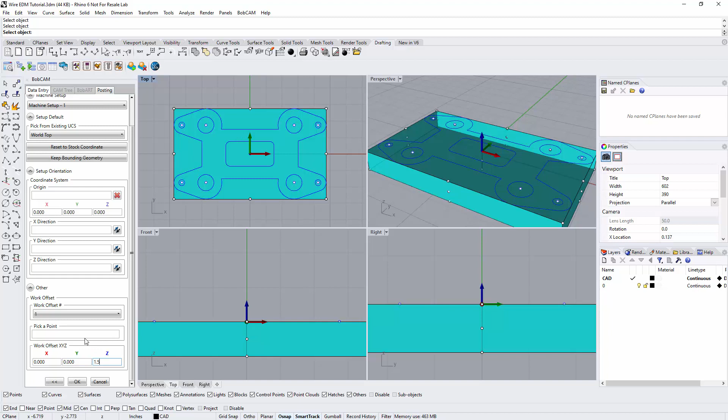And then right here, we can go and pick our origin. So where are we basing all of our code off of? So I'm actually going to leave it right there at XYZ 0 because I'm using that area. I'm going to be cutting a hole there to plunge into anyway, or feed my wire through, and then go and cut my part. So I'm good with it right there, and so I don't even have to set up the origin. And the only thing I'm going to do is lift up Z, just say 1.5 inches, and then I can hit OK.

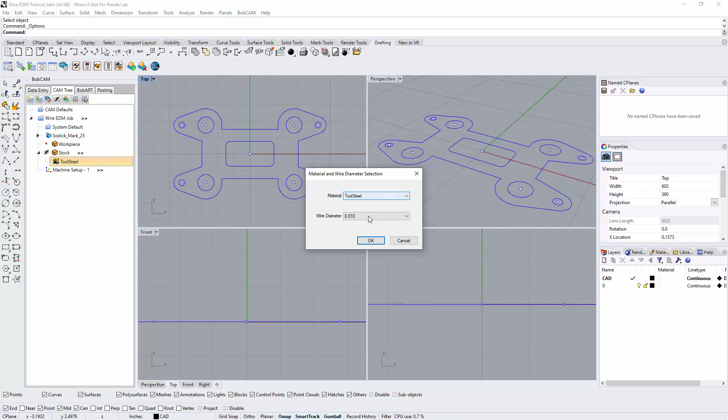After I have the stock created, I like to just right-click on the word stock and say blank, unblank. And then if I expand that, I can see what material is currently selected. And if I want to modify that, I could just say edit and choose a different material. Depending on your machine and post, you can also open up a database that lets you change all the information for this. But I'll go with a 10 thou wire, hit OK.

And then with this one, we really just have kind of one setup for this. A lot of these are going to be inside cuts. So I'm going to right-click on my machine setup and I can see what types of features I can make. So we have a 2-axis inside, meaning it's a 2-axis cut, just vertical walls, and they're inside cuts. We have a 2-axis outside, so that's going to be for the outside of the part. We have a 2-axis open, which would allow us to do just a specific open area.

Or we get into 4-axis. And we're not going to do any 4-axis here. It's essentially the same settings as doing a 2-axis, except you're picking multiple pieces of geometry. If we had a center pocket that was a 4-axis, we'd have this center pocket here, and then maybe a wider one because it's got a taper to it.

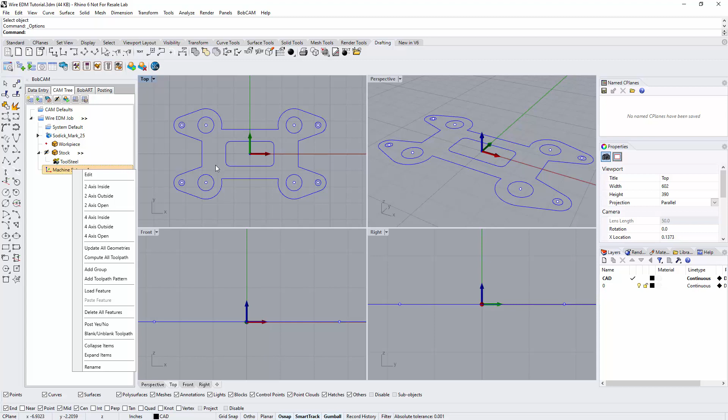So I'm going to start by doing a 2-axis inside, and I'm going to select my geometry as these inside shapes here. So I'm just going to pick all of them right here. So we're on 7, 8, and 9. And then all the points that are on the inside of that, those are going to be the points we use to say start here and feed to the wall. So we'll have holes drilled in all those locations.

So I can then go in and look at each one of my chains and see where the arrow is at. So if I want to pick a different start point, I can. So for that one, I'll put it in the middle.

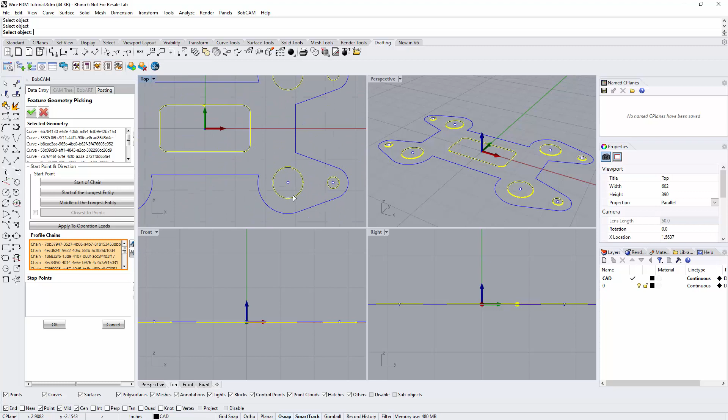The rest of them are circular, so I'm really not too worried about it. And then I could go ahead and just hit OK. Now, when I hit OK, I could just go next. Right here, we have our stock thickness. We have the location of our upper and lower guide, which you may or may not need depending on your machine. Some machines use this, others don't.

Right down here, we have our choice of whether or not we're going to do glue stops with or without leads, or whether or not we're even putting glue stops on the part. So your glue stop is an area that before it finishes cutting the entire part, when you still have a tab left, it's going to let you go in and add a stop distance. So essentially where we stop, so we get a chance to either glue the part or drop a magnet on it so the parts don't fall out. In my case, I'm just going to say no glue stop.

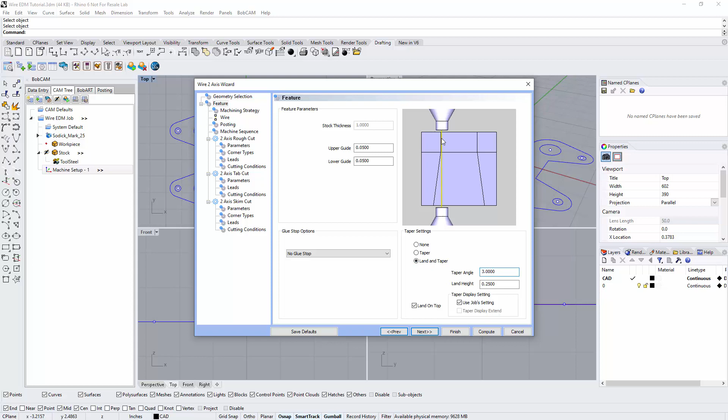And then right here we have our taper settings. So the taper settings are either none, so we're going to get a straight wall. We can add a taper to the geometry, and we can tell it whether it's a left or a right taper based on whether it's a negative or positive value, and whether we taper from the top or the bottom. Right here, we also have the ability to do land and tapers, so we can have a vertical wall and then the taper. But in my case, I'm just going to go with none, just a standard cut straight through.

Then I'll say next. Right here, we get our choice of doing different types of cuts. If we left glue stops, you would get one extra cut, which is a tab cut. And so in this case, because it didn't leave tabs, we have a rough cut and then our skim cuts. Now, if you want to do multiple skim passes, you do not have to add in multiple skims to your operation. What you're going to do is just leave one, because when we get to the skim pass, we get to tell it how many skim passes we're going to use. So I'll go ahead and say next.

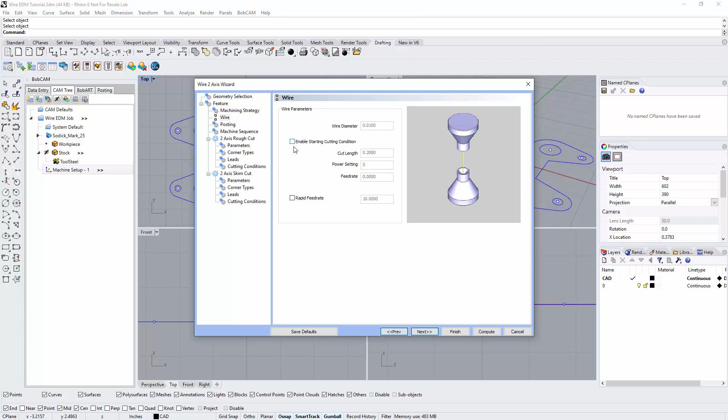Right here's our wire information. So it's a 10 thou wire, whether or not we enable starting cutting conditions or a rapid feed rate. After that, we'll hit next. Right here's our posting tab. So we have our spline or arc output tolerance, which I'll leave at a 1/2 thou. That's fine. Our work offset number, and then our posting order. So we could say finish individual shape or go by operation. So go do all the rough passes, then all the skim passes, then everything. I'm going to go with individual shape, rough it, skim it, do what we need to do in that one shape before moving on to the next.

Right here we have our machine sequencing. So how do we organize the order of this? Closest is going to start at whatever position we select here and go to the next closest cut. No sorting seems random, but it actually runs in the order that you pick the geometry in. Or we could say, let's just go across the X direction or the Y direction. So I'll say, let's go X direction, start from the upper left-hand corner, and we'll zig.

Next, I then have my parameters. So I can either do a standard profile cut, so we just cut our way around, and the part's going to drop out. Whatever slug we have is going to fall out. Or I can go with a coreless. And coreless for me really depends on the hole that I'm trying to make. It's usually going to be a hole because I have the ability to go in and drill a hole and then have this kind of clean up the rest of the hole. So if I have a 1/2 inch hole in my part and I've drilled a 1/4 inch hole in it, I could have a coreless cut basically go in and kind of pocket it and take all that material out. Or I could go in and just do a standard profile. So I'm going to go with the standard profile.

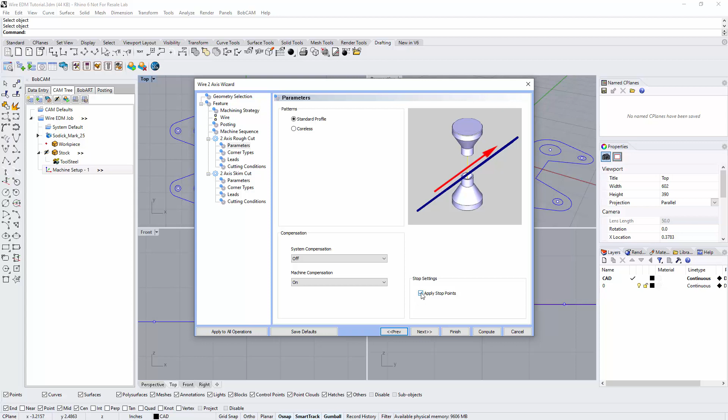So you can either rethread, do whatever. It's a stop point that just stops it. I don't have any selected, so whether this is on or off is not going to change the tool path. Right here we have our corner types, so we could go with a sharp corner. We can go with a round corner. We can make a loop radius, a loop length, a triangle, or a bisected line. And we have them both on external and internal corners.

Right here we have our leads. So if we had a 1/4 inch hole drilled into that 1/2 inch hole, so we've already had a 1/4 inch cut, especially with the coreless, this is important. I go in and tell it what the diameter of the hole is that I have already there. That way it doesn't do that coreless cut from the center of the hole. It does it from the edge of the diameter. So it does it from where the hole is drilled to. But I'm going to leave that at 0.

I have a thread wire, whether we thread it automatically, vertically or not. And then we just have some leads. So we have circular leads. We have perpendicular leads. We have a perpendicular blend, so it actually adds a radius to the corner. We have parallel. And then right here we have select point and point blend. So select point just lets me pick a point. It goes from that point to our start location and it starts its cut. You could even say perpendicular to the closest wall. Or you can go in and do a point blend. So we still have the points, but now it's going to add a radius into that cut.

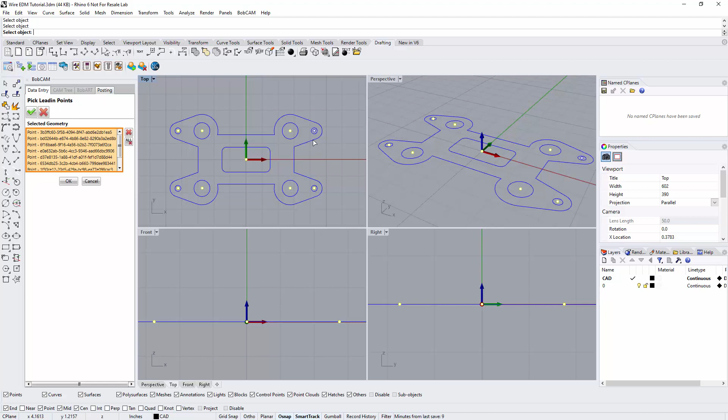So for me, I'm just going to say select point and then pick points. And I'm just going to go in and pick all these points that we drew earlier. So I'm just going to add all these in. There should be one right here at XYZ0. We'll grab all these as well. And now it knows where it's going to start from. So I'll go right there and then hit OK. Now, after we have all those points selected, you're only going to see one, but it does remember all the locations to those holes. So I'm going to choose the next option.

Now, inside of next, we get our choice of our cutting conditions, and whether or not your machine has a database is going to depend on your machine. Mine has a database, so I can define the offset, the power setting, and the feed rate, as well as any speed and tension for the wire. If you need to edit this, don't edit it now. And the reason I say this is because on the edit table, all we see is the rough and the single skim pass, but I want to do 3 skim passes. So I don't actually get a chance to set up my skim passes until I get to the next page, which is the skim. The last page of the entire job is another cutting conditions page that I can go in and make my modifications to.

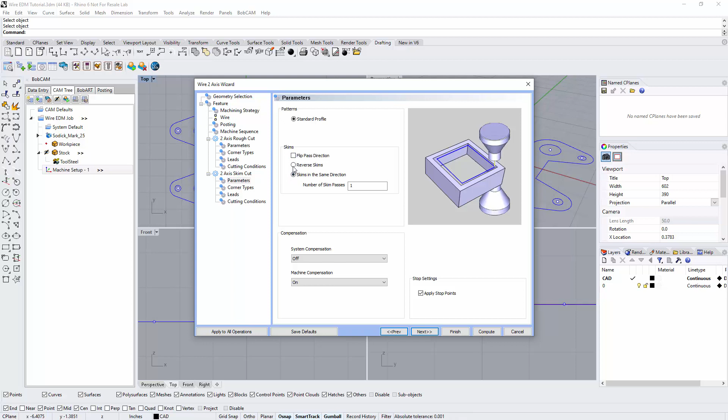So I'll do a standard profile. We have a choice to just flip the pass direction. So if we went clockwise on the rough, it's going to go counterclockwise for its first pass on the skim. And then with the skims, we could either say run them all in the same direction or reverse the directions as they cut. I'm going to run them all in the same direction, and I'm going to set their number of passes to 3. And then again, I'm using machine compensation, and I didn't set any stop points. So next again. Corner types, just going to leave them on sharp. Just going to let it cut based on what the geometry shows, and that's primarily what you're going to use the sharp for.

Right here's my leads. Once again, I do want to use the same leads. So instead of having to go back and repick all those points, I'm going to go up to the leads page for the rough pass, and I'm going to say apply to all operations. And what it does is it copies the leads page from here down to here. So now we'll see I have the same lead in and lead out points.

Next again, we have our cutting conditions. So again, this would be the page that if you were going to set up the offset, the power setting, or the feed rates for any of these tool paths, this would be the page I do it on, because if I go into the table now, I get all of the passes defined, not just the initial rough and skim. So now I can hit OK.

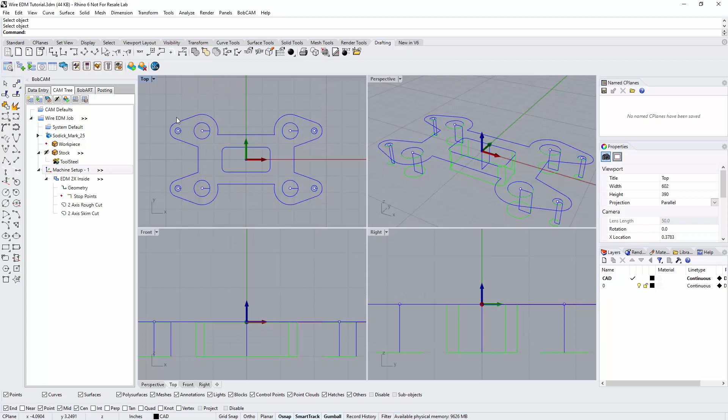When I'm all done, I can hit compute. And you won't see much on the top view. That's what's really nice about having this perspective view. But there it is right there, just going around making its cut. There's all our leads. You can see all the lines for those leads just connecting in. And then that's it for the interior cuts.

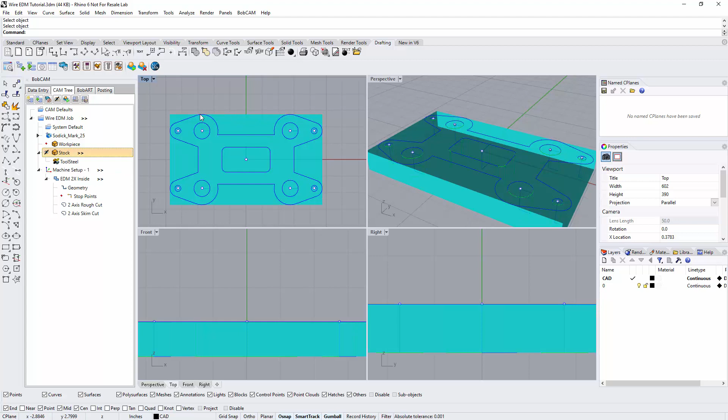So now I could go in and do the exterior cut, but I want to look at my stock real quick because I want to pick a good spot. Probably one of these top edges right here is where I'm going to try and do my lead for this so that I'm off the part. So I'll right click, and this time I'm going to do a 2-axis outside. So I'll select my geometry. I'm going to pick that piece of geometry there, which I've joined together using the join function of Rhino, so I can pick the one thing.

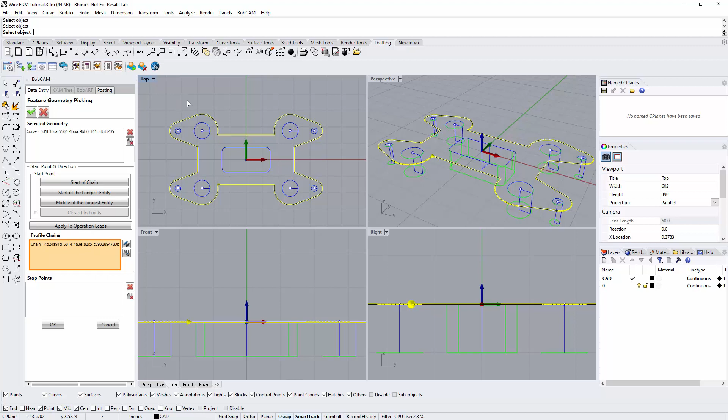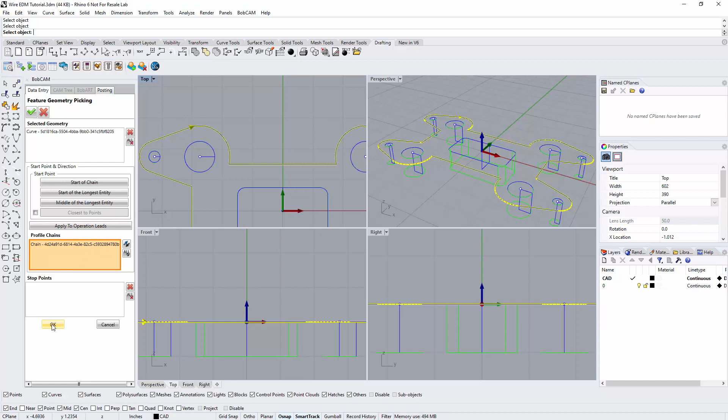Otherwise, if it's broken, you brought it in as a DXF or anything like that, you will have to pick each individual entity. And then right here, I'll pick my chain, and I'm just going to zoom right on this corner and pick it right there. All right, and I'm also going to flip the direction of it by clicking the tip of the arrow. So I want it to be a G41 compensation to the outside. So that'll get me to go to the outside of the part. And then I just have to make sure I have a lead that's long enough to go off the stock. When I'm done, I can hit OK and then go next.

Now with this one, we got our upper lower guide, whether or not we're using glue stops. So I'll do a glue stop this time. We have our stop distance. So how big of a stop do we make? And then whether or not we're tapering. We don't have a land and taper on the exterior cut, on the outside cut. So I'm going to leave that to none. Right here, I'll choose my strategy of a rough cut, a skim cut, and a tab cut.

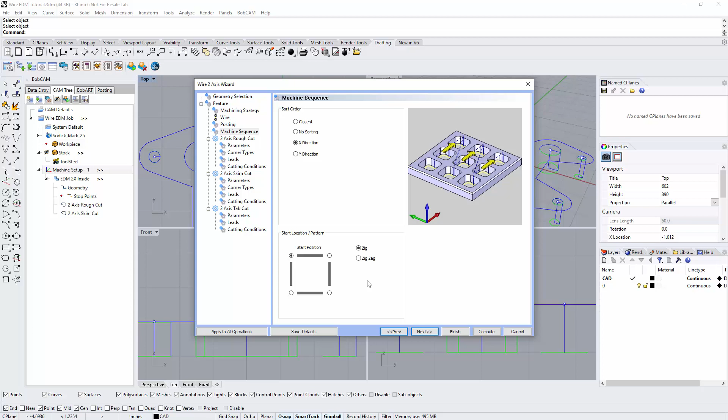So I'll go next. Right here, we have our wire information and our posting. So with posting, we still have the arc spline output, the work offset, the posting order, but we could say, let's do our tab cuts last so that we can wait till the end to cut those. Right here, we then have our sequencing. Again, I'm just going to go in the X direction. It's only one part, so it really shouldn't change too much. I've picked my start point already.

Right here, we have our standard profile, system compensation off, machine compensation on. Our corner types, I'm going to leave those on sharp once again. Our leads. Now for the leads, I just need to make sure the leads are long enough to get off the part. So I'm going to set up a circular lead in, and I'm going to make the radius a 1/4 inch, and I'm going to make the length a 1/4 inch. And that should be plenty to get me off the part so I can run the wire and then just start from the outside into the part.

Right here, we have our cutting conditions. Again, ignore this because the last page is going to be the cutting conditions. That's where we could set them all up if we have to modify them, or it's where we get to see them all if we have the database. Right here's our parameters, so we can start with a standard profile. I'll do 2 skim passes.

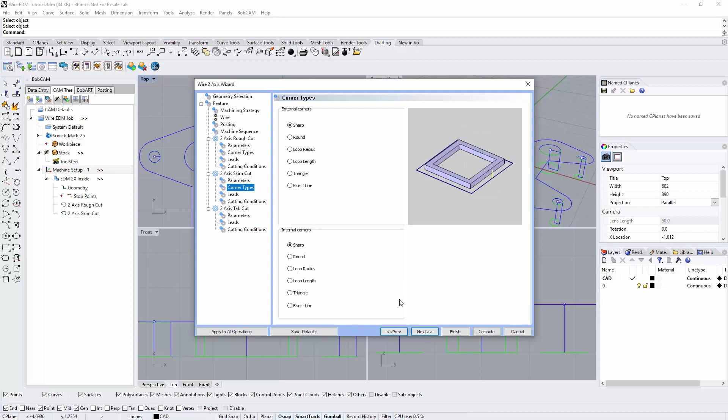System compensation off, machine compensation on. I want that G41 and G42 to output when I need them. And I'll even do the reverse skims on this one. Right here is our corner types again, our leads once again, and our cutting conditions once again. So I want to do the same kind of thing with the leads. I'm going to set this up as a circular.

I'm going to set the radius to a 1/4 inch and the length at a 1/4 inch. And then go next. Cutting conditions, once again, wait till the end.

And then we have our parameters for the tab cut. So we could say, use the standard profile. We could flip the pass direction. We could even use a knockout to go in and knock it out. But I'm just going to flip the pass direction, machine compensation on.

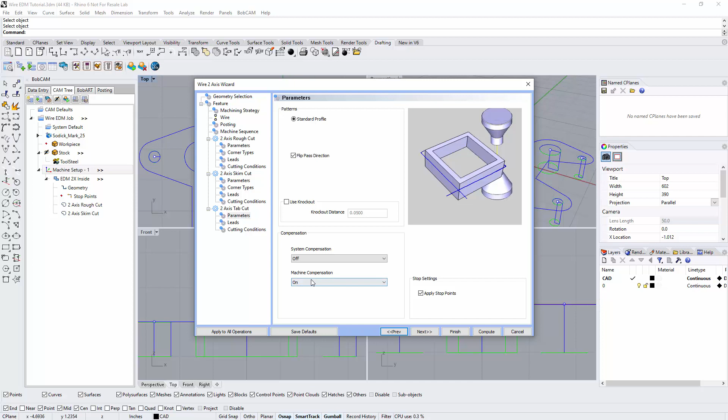For the leads, I'll go just perpendicular at 100 thousandths. And then right here's our cutting conditions. This would be the page that I would finally go into my edit table here and put in any of the values I need to enter in. Otherwise, I'll just hit OK and hit compute.

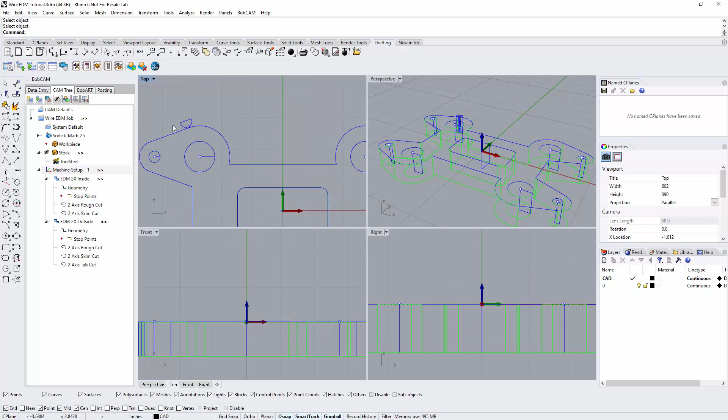And once again, there's our cut. You can see our leads right there all the way around.

So now we could go ahead and launch the simulation. I'm just going to go up to Start Simulation right here. Remember, it's going to launch into whatever screen you're active on. So I'm going to double click on the top here first and then launch the simulation.

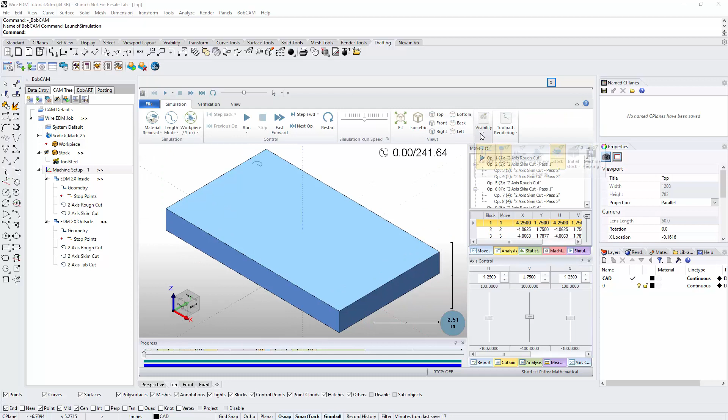Now, when the simulation for Wire EDM launches, one of the best things you could do is turn on a setting in here, which if I expand this down and I go to visibility, you could turn on machine housing. This is just a good way to kind of see what's going on. You can see the guides of the machine kind of cut, and it just helps out for viewing everything. So I'm going to slow this down and say run.

We're going to see there's our first arc, skim passes. There's our second. There's our third, fourth, fifth, kind of reset there. There's our first skim, second skim, third skim. And it's just going to keep going around doing the same thing.

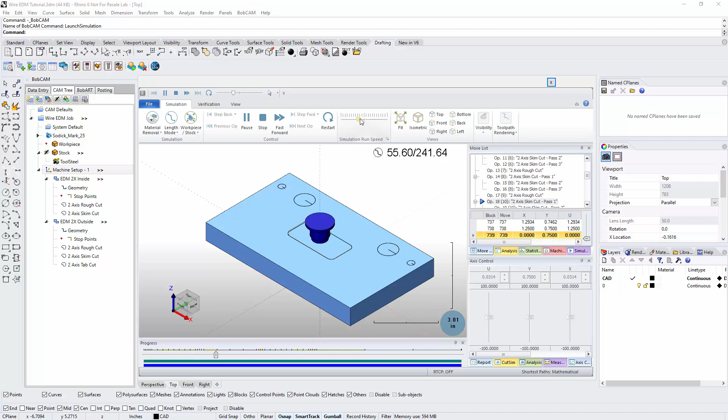There's our inner pocket. There's our extra holes. And then when it gets to the end of this, it's just going to start on the outside over here into the part. And we can see it starts off the part. That's perfect. That's exactly what I wanted to see. It's going to go in, keep cutting all the way around.

And then it's going to go ahead and lead out right there and then reverse the skim back. And I'm just going to fast forward. So it goes and cuts everything.

Now, in the simulation video that you'll see I did the milling part in, I didn't have the ability to remove this stock from here because I didn't have any extra stock. But with this one, if I rotate it, we'll see the cut goes all the way through, but I still can't really see what the final result is. I know what it's going to look like, but I want to see what the final result's going to be.

So the tab we can go to is over here. It's the Measure tab. And in here, there's an option called Remove Chips, and either you select chips, or in this case, I'm going to choose this option that says only keep one part.

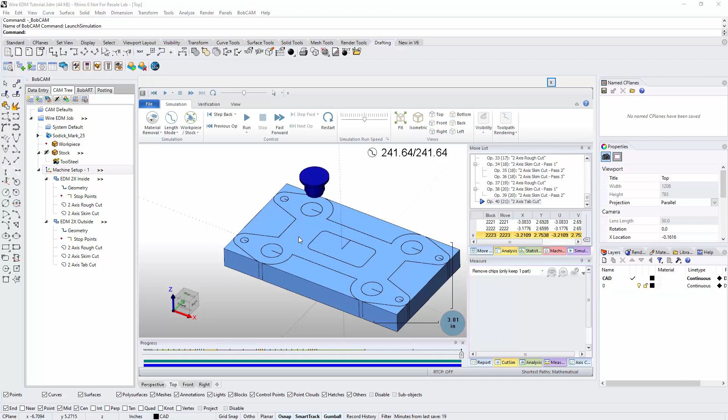By doing this, I could go to my part inside the simulation window and click on it with my middle mouse wheel like it's a button. So I'm just going to click that middle mouse wheel in, and anything that's not connected to the part will disappear, and this is what I should expect to get at the machine.

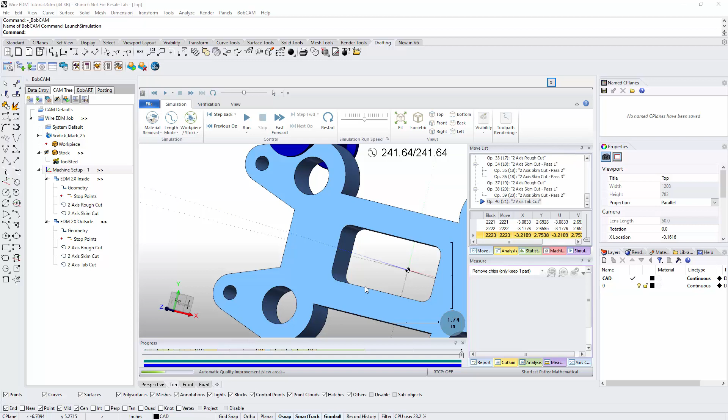So we're using that wire. We got a nice sharp corner in the corner there. Basically, the remove chips went in and just gets rid of all the areas that would have fallen out anyway. So there we go. We have our entire part done.

And again, when we're all done, we can close it out. And then to generate the code for this one, the big thing is make sure you have the right post processor, right machine. You can switch the machine if you need to, but just know the database does not transfer between machines. So if you pick the wrong machine at the start, it's not going to transfer into the new machine. You'd have to go back and reset up all your cutting conditions.

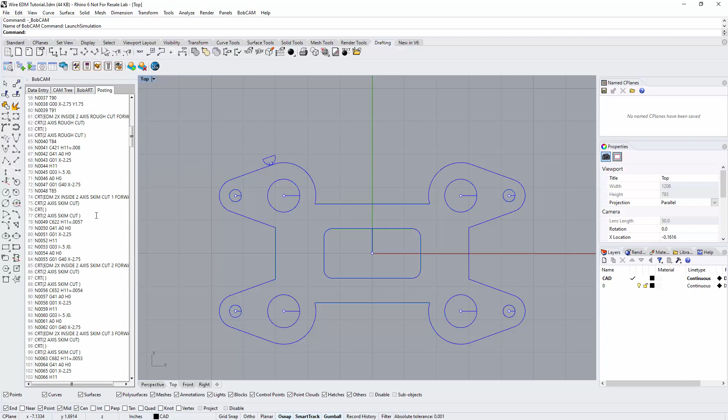But all we have to do is right click on Wire EDM job and say post. And there is the code for all of those cuts. And that concludes the video on the Wire EDM tutorial from inside of BobCAM for Rhino.